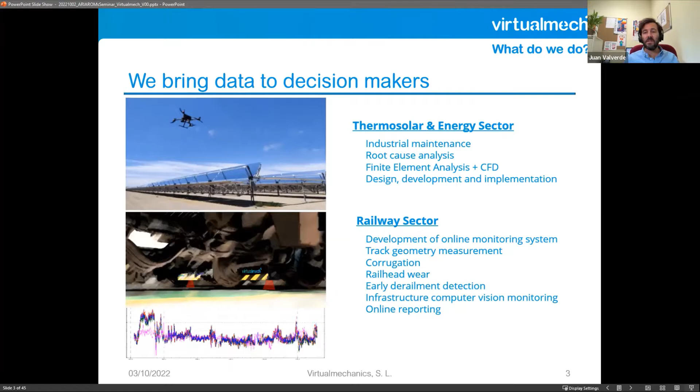So we work a lot, as I said, in the energy and railway. And for instance, you can see here some pictures of data taking infrastructure like drones, and this is an onboard system on a train. And with this data and computational models, we are able to provide knowledge to the clients in order to take these important decisions. So the company was a spin-off from the University of Seville, and the core, as I said before, is computational mechanics and numerical methods.

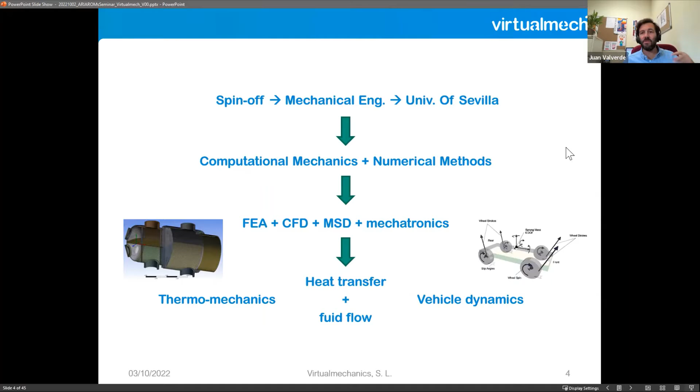But we have been working now for 12 years, so we have been changing a little bit the scope of the company. We do a lot of mechatronics now, and we put systems on industrial applications like the onboard systems, or the system that you saw on the energy market, like monitoring critical components. But basically, we are computational fluid dynamics and finite element people. And at the end of the day, we like to stick to our guns, and simulation is the most important tool that we have developed in the company. Right now, we are 15 people.

As I said, we do R&D and innovation, both in-house and outsourcing for large companies, and also industrial projects that benefit mainly from the R&D developments that we carry out, basically energy and railways. All related to ARIA is more related to the energy sector, and there we work on the renewable generation, solar. We work a lot also on energy storage, thermal energy and thermochemical energy storage, and support to the plants.

The solar plants, at the end of the day, are something new, and many problems arise, and the owners of the plants are not the technology developers, but big funds. So they need people to give them some advice on how to manage the assets from the operation and maintenance point of view. And we can say that we do a lot of consultancy, and we also develop our own projects and systems, both software and hardware. And for instance, in the concentrated solar power, which is the object of the talk today,

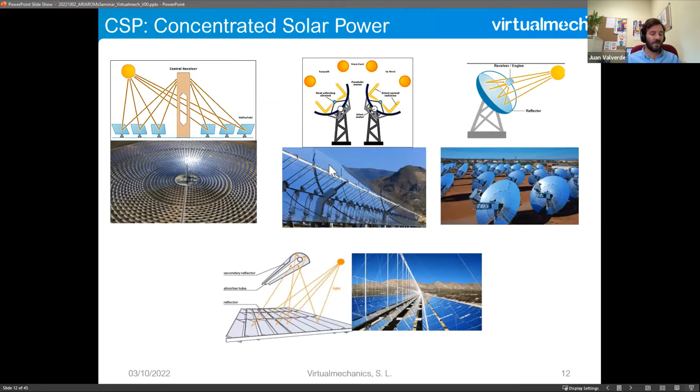And with the storage that I'm talking about, the only commercial storage system that is cost effective today is thermal energy storage. You need to know that any project with batteries longer than 1 hour storage, and we are talking here about 12 or even more hours of storage, any project of energy storage based on batteries has been paid by the battery supplier, because nobody's going to pay 25 times the price of the thermal energy storage.

So energy storage is still a problem to be solved if we want the renewable energies to penetrate, and not only solar, but every renewable which is intermittent and depends on the weather. We cannot control it, so we need to uncouple the generation here in the tower or the parabolic trough from the demand and the electricity production. So the storage system can make this decoupling, so you can dispatch the energy anytime. If we had more penetration of CSP with storage, we wouldn't have that many problems with gas right now, for instance.

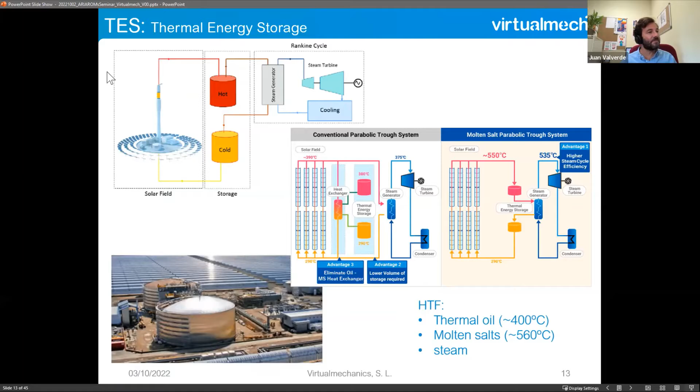And what we do here is with the sun, we break a molecule. In this case, we can decompose limestone, or any material containing calcium carbonate, into calcium oxide and CO2. So you break the molecule, and you can store the products, and then when you put the products together again, there is going to be a very exothermic reaction, so we can take the heat and put it in a power cycle.

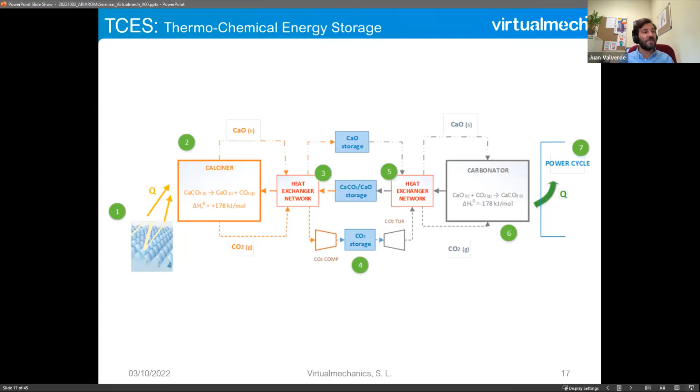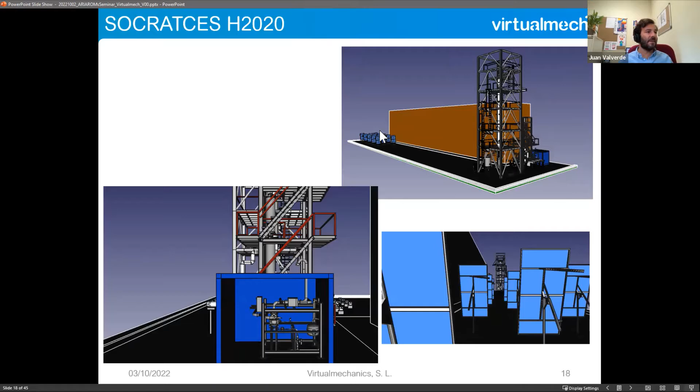And the energy density of this compared to the regular thermal energy storage based on fluids, on sensible heat, is like 25 times more energy. And also you can use it as a seasonal storage, because you can store it as long as you want. So these are some cuts of the design of the plant that we did, the integration and all the solar part, the solar field, the tower, and all that. And you can see the plant here, which was built here in Spain.

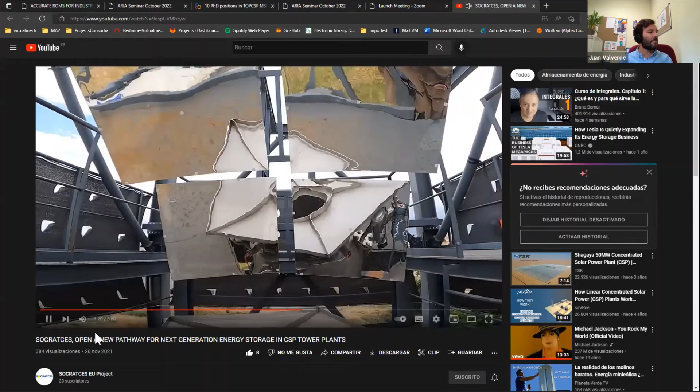I may have some video over here talking about the technology and all that, but maybe you can check it out later.

This is a parabolic trough system, and usually what you have here is a fluid that is a thermal oil, but we want to have the molten salts inside. The problem with the commercial molten salts is that below 220 degrees, the molten salts freeze. So you need a huge electrical system to keep the molten salts in a fluid state, because otherwise you will have a big problem.

So the project is really changing the thing 180 degrees and letting the molten salts freeze inside the collectors, and then doing very carefully a tracking of the sun. We are able to melt the salts in a way that we don't damage the receiver pipes. This is a receiver pipe, and this is the molten salts melting because of the sun heating the pipes, the receivers.

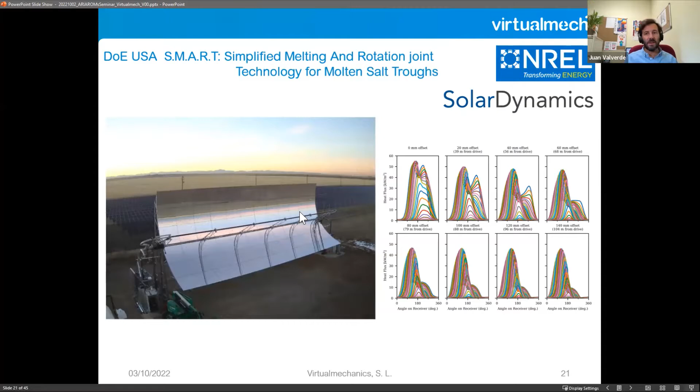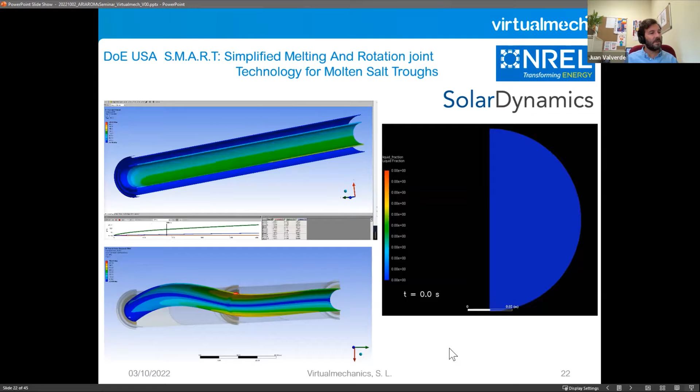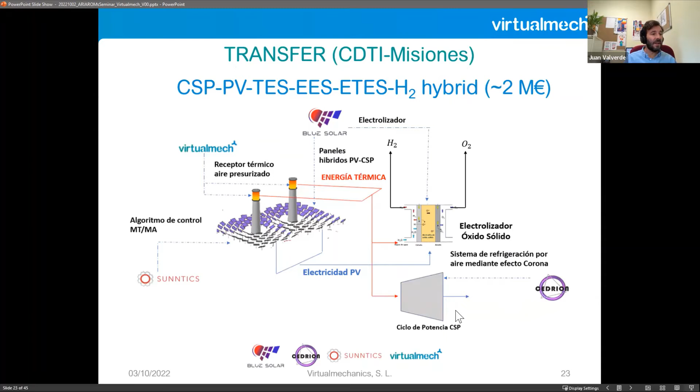Okay, and other projects that we have are related to hybrid multi-demand multi-generation systems. This is a Spanish R&D project, and we are doing a digital twin of the multi-generation multi-demand system. We have generation of hydrogen, electricity, steam, different things. I will show you. This is the scheme of the digital twin.

So we have multi-generation, we have PV, we have CSP, we have different towers with different fluids, and as I said, different demands: hydrogen, heat demand, electricity, etc. So designing a plant which relies on an intermittent source like the sun is difficult. So when you have many demands and many generation sources, you definitely need a digital twin to design the plant and also to support the operation.

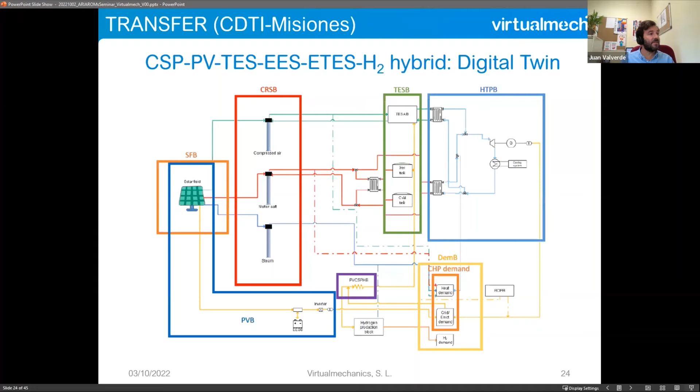Okay, and also inside this project we are working on high temperature CSP receivers. At the end of the day, on top of the towers, what you have is a very critical heat exchanger. You have the radiation entering the receiver, and we need to heat up a fluid most of the time. Usually the commercial stage is working with fluids like steam or molten salts. But in order to move to next generation CSP, we need to work with other fluids so that you can raise the temperature. The thermodynamic cycle is going to have a better performance if you raise the temperature.

So we are working with compressed air, which we can raise to temperatures up to 900 degrees, and also with supercritical CO2 and things like that. At the end of the day, when you raise the temperature above 600 degrees, you need to put the receiver inside a cavity, because otherwise the radiation and convection losses to the ambient are too high. So you need a cavity like this. I will talk about these things later in the talk.

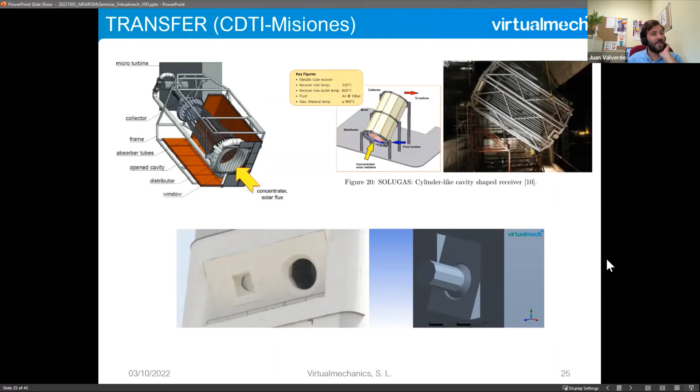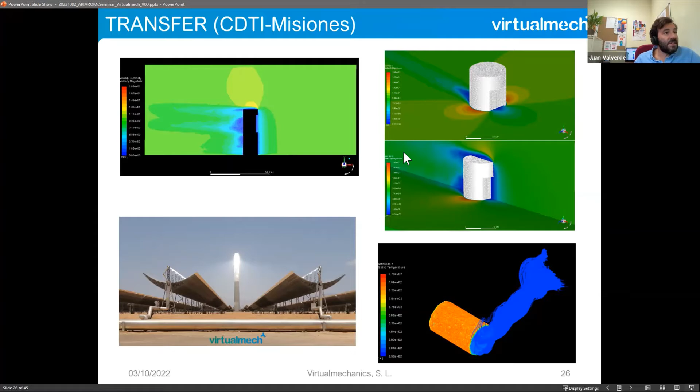But basically, just as an introduction, we need to calculate the heat losses due to the wind hitting the tower. This is the CSP tower in Morocco. This is the biggest solar plant in the world, and we have been working there many times. We took this picture actually, and we need to understand the heat losses, both convective and radiative. And one of the problems we are working on in this area is simulations taking into account the convective heat losses to ambient from the receivers, either external receivers or cavity receivers, like the pictures I'm pointing to here now.

And we also have other projects more on the industrial side, not high temperatures, but things more, let's say, small, that we can control, because we are a small company. Of course, we cannot develop a 500 million euro plant, but we can do the same things that we do in the large plants in a big building or district, or things like that. So we work at the low temperature level, also to provide heating and cooling demands for, as I said, buildings and things like that.

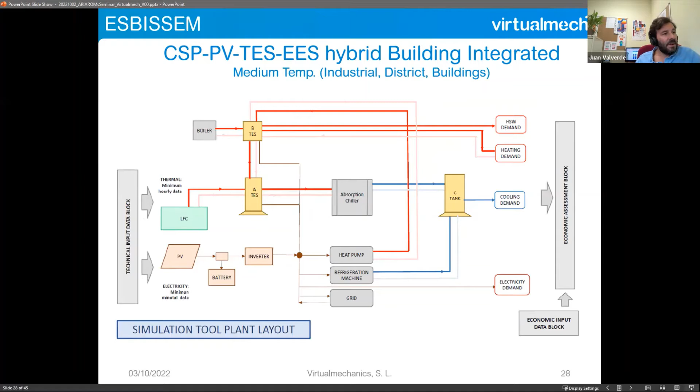And at the end of the day, it's the same complication, because you have many sources of energy, like PV, CSP, and different demands. You can have hot sanitary water demand, heating demand, cooling demand, electricity demand, etc. Okay, so we are working a lot on these digital twins. And this is the pilot plant that we are building.

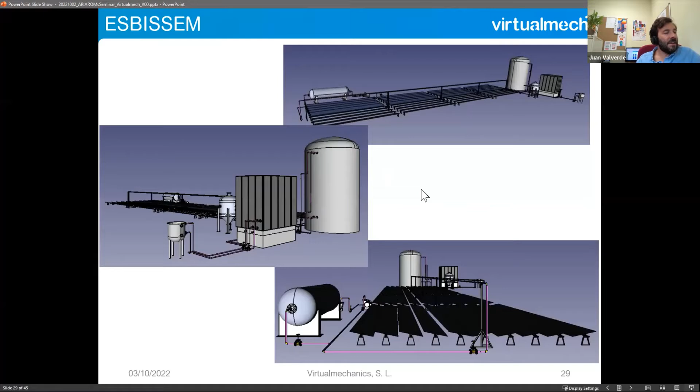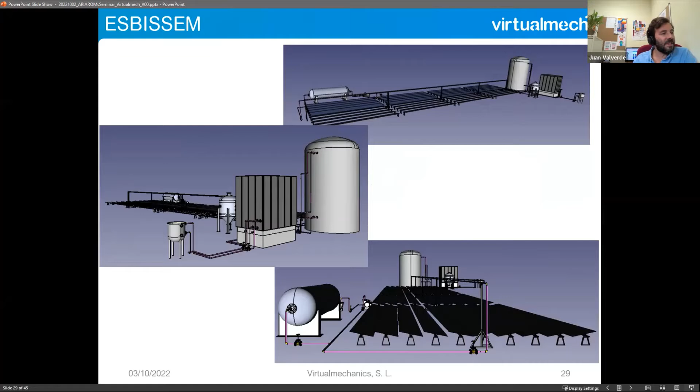This big tank here. I'm showing this because it's not in the ARIA project, but now that we discovered reduced order modeling, we are using it extensively inside the company, and there are many places where you can use reduced order modeling, for instance, in this particular project. What I'm showing here is a stratified tank, and this is a packed bed tank that we are modeling with ANSYS Fluent with porous media simplification.

Okay, but this takes like weeks to do, and we always have the problem that it takes a lot of time to do our designs, to optimize the equipment. So we have to live with these large periods of time. But now that we have discovered reduced order modeling, we are entering a new phase where we can do things quicker, knowing that we are incurring an error, but that we can control what we are doing.

And then at the end of the day, the large simulation that takes forever, you can do it at the end with the last model, after you have designed and decided how your system is.

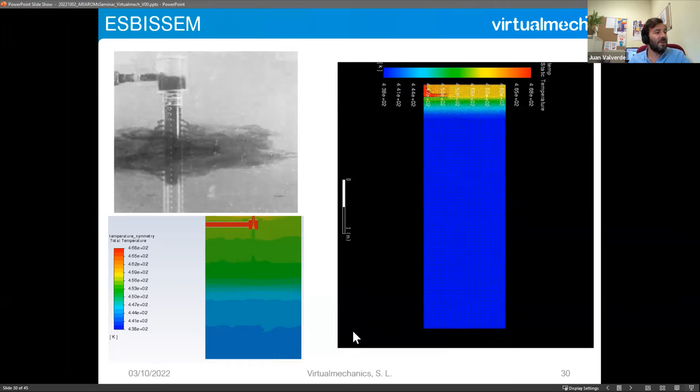And if you allow me, I would like to draw your attention today to this doctoral network that we just got. I was about to send an email to the partners of the project to do some publicity of the doctoral network. We have been granted a Marie Curie Action Doctoral Network, and we are offering 10 doctoral positions. I will go to the one related to Virtualmech and University of Seville, which is this one, DC1, and it's related to design of CSP towers and solar fields.

It can be very interesting because we are going to be combining optics, fluid, thermal, mechanical simulations, and optimization. So it should be fun. If you have students that are willing to do a PhD, the only requirement is that in the last 36 months they didn't spend 12 months in Spain. So we are very open to people from the ARIA network, and I hope it can be interesting for any of your students or somebody you know. So if anybody's interested, please send me an email.

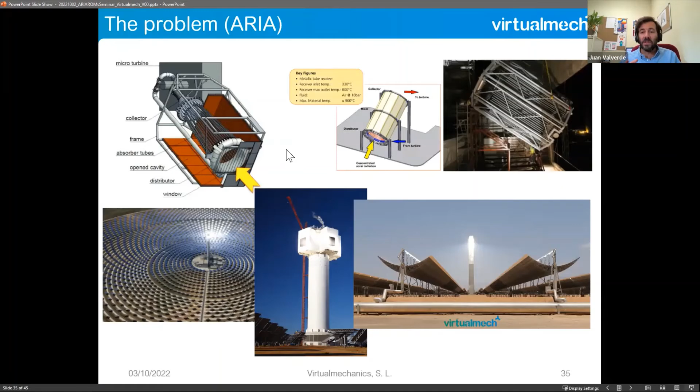So you design the cavity and the receiver panels. That's why we divide the problem into two parts. Although it's a coupled problem, at the end of the day, we need to decouple somewhere, okay?

And we are decoupling with two different problems, we call them P1 and P2. For instance, this is a half cylindrical cavity. In the back walls, you will have the receiver panels like this, where the cold fluid enters a distributor, and then you put the fluid in many different pipes. You heat it with the radiation here, and then you collect the hot fluid in a collector, and then you go to the thermodynamic cycle.

So on the one hand, you have the problem of the heat transfer of energy from the radiation to the fluid, and you have on the receiver panels and the full cavity the problem P2, which is the convection heat losses to ambient. But also, if you want to solve P1 and P2, you need to solve in a coupled way the heat radiation losses to ambient. So it's a kind of complex problem that we are trying to solve here.

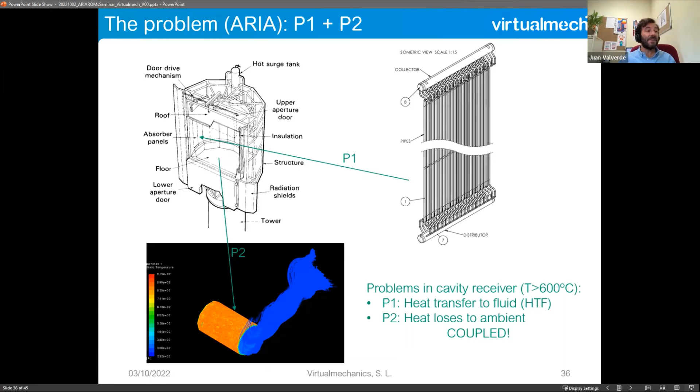And at the end of the day, what we want to do is to optimize our design. So we want to optimize the receiver panels and also the cavity size or the cavity shape. So if we take a cavity like this, this is the aperture where you have the radiation, and also the convective heat losses come outside to the ambient from this aperture, and then we will have the receiver panels maybe on these walls, on the back side, on the lateral sides. So we need to solve these two problems and try to optimize the shape of the cavity.

So in order to do so, we can pose an optimization problem where we want to minimize the heat losses by convection, radiation, and the optical heat losses, because you need to put all the energy in the aperture, and this is quite complex when you have a big solar field. Imagine that you have a heliostat like 1 kilometer away from the tower, so it's really difficult to target the aperture.

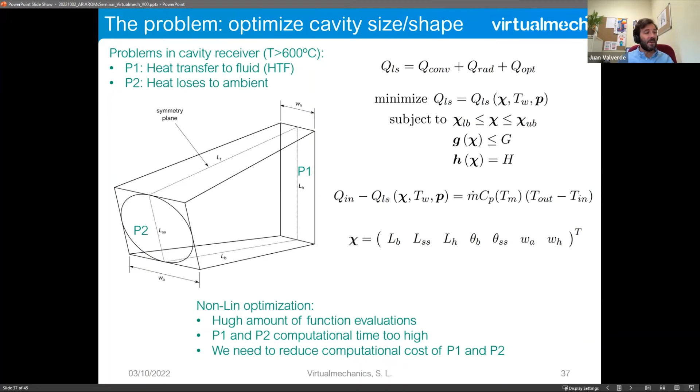So you have these heat losses, and the shape of the cavity and all the radiation and convection heat losses can be described in terms of many parameters like material properties, fluid properties, etc. And then your open variables will be the geometry. Okay, so we have the variable which is the geometry, and then we want to optimize with different constraints that we may have. So to do so, we are going to be evaluating the problem many times, and we need to reduce, of course, the computational cost of P1 and P2.

Okay, so the thing that I want to show today is how we decrease the computational cost of the problem P2, and we are doing so with a non-intrusive ROM. This is the cavity, and what we model is the air inside the cavity and the ambient air. This is our control volume. You can see the mesh here, and the parameters will be the velocity of the wind that is hitting the tower and removing the air from inside and removing energy. Also the temperature of the receiver panels, that we call the wall temperature.

And ideally, we want to change the size, but changing the size is quite complex, because you need to keep the mesh with the same number of elements and nodes and things like that. So it's a little bit tricky, but we are working on that. But before, we were moving these two parameters, the wall temperature and the wind velocity. And we did so with this tool, EZyRB, which is from our partners from SISSA. Just to give them credit for the tool, which is really useful, and they have been very helpful and always available for any doubts that we had.

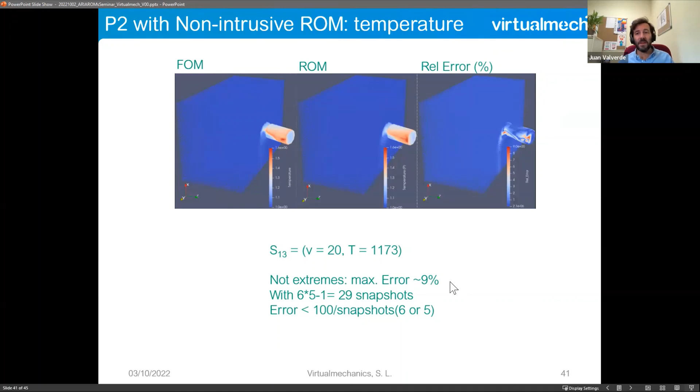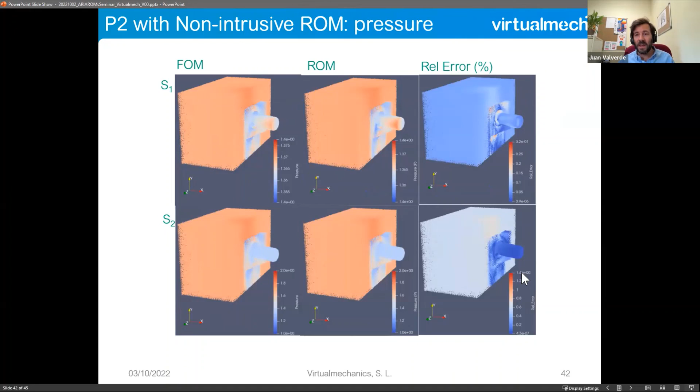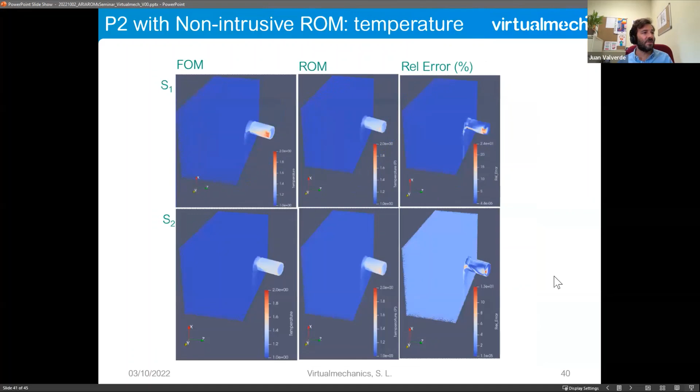And if you go to other variables which are not so stringent, like the pressure, we have a 0.32 or 1.4% error, which are incredibly small. And even for the velocity field, we have 2.5 and 1.5% error, which for us is pretty amazing. So this works for us, and now we are trying to tackle the problem of changing the size and changing the mesh in order to be able to work with geometrical parameters.

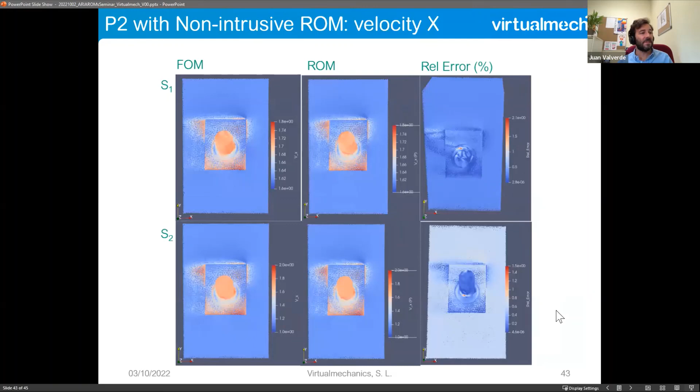And before I finish, just one second, because we have been working a lot also with our partners from the University of Seville, but this time with intrusive ROMs. Just to say that we are progressing in that, but they are the ones that should be showing what we are doing in this particular regard. We are tackling problem P1, and we started step by step with some benchmark problems.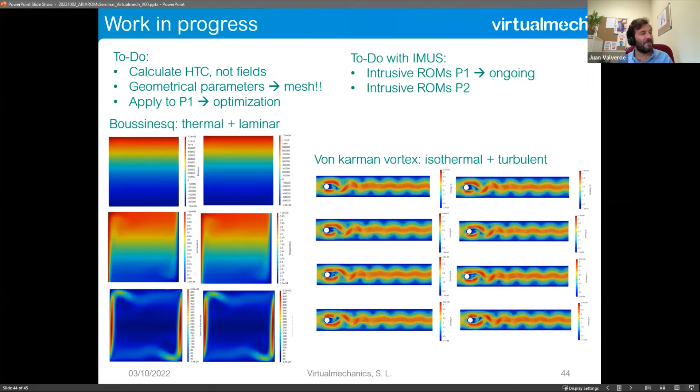We started with an isothermal problem, but turbulent flow, which is the von Karman vortex problem. And then we moved to a non-isothermal problem with thermal energy and laminar flow, which is a Boussinesq type problem. And both of them worked very well. And then we are moving to the real problem, which is turbulent flow and thermal. But this is another story that Thomas and his team will be able to talk about another day